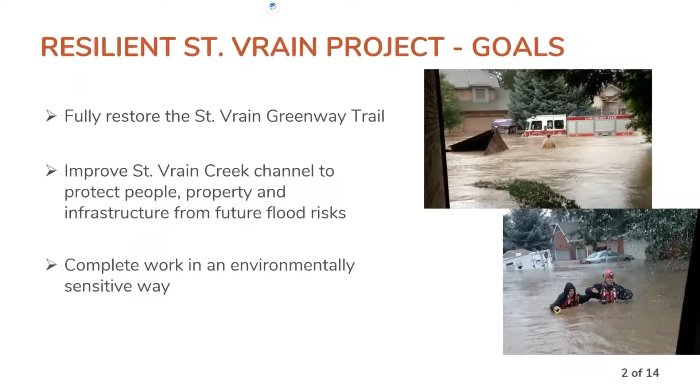The project was broken into several phases. The Sandstone Ranch Reach, out to the east side of town beginning at Boulder Creek and working upstream to County Line Road, was the work to restore the St. Vrain channel through the city's open space out of the Sandstone District Park.

There's a gap reach between Sandstone and the city reach. For connectivity and floodplain analysis, we certainly evaluated that section. However, there were no project improvements included in the master plan within what we referred to as the gap reach there.

And then finally, the City Reach, which is the section of St. Vrain Creek through the developed portion of town, really from the confluence with Left Hand Creek out west to Airport Road at the extent of the city's planning area.

This next slide zooms in on the City Reach itself, which is the majority of the work to be completed on the project. This slide illustrates the phases.

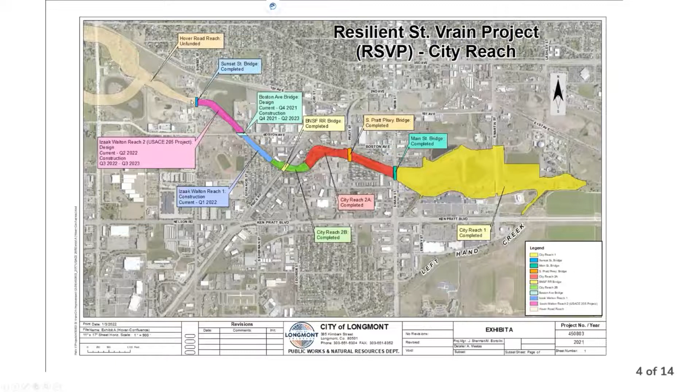I have a short video that I'm going to try to play, so I'm going to get out of my slideshow presentation. I was preparing this slideshow presentation and realized that this video is now about 1.5 years old, and maybe worth doing another aerial flight to show improvements on St. Vrain Creek. Oh, hang on. Here we go.

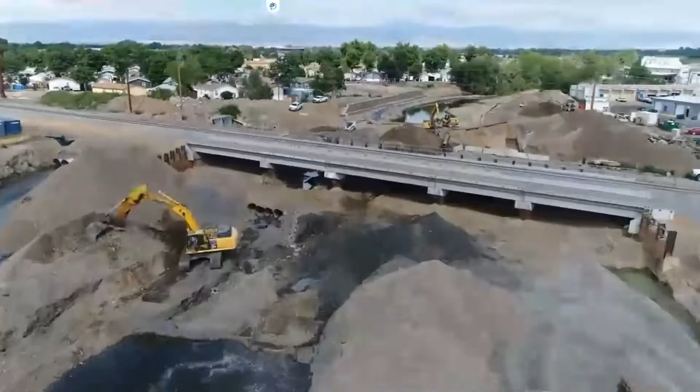Okay, let me find my mouse and I will. Oh, sorry. Oh, sorry.

So clearly I put together that presentation for a council meeting back in August of 2020. I like the very end of the video where you can see the work going on, but that work's complete now and a lot of vegetation is filled in, so we'll have to try to update that video. Okay, so back to the presentation. It should be back on the screen again.

As I'd mentioned, some of the work that's been completed, city reaches 1, 2A, and 2B, including replacement of several bridges over St. Vrain Creek. Some of the accolades for the project: it received a 2018 APWA award for sustainability for large communities, and also an APWA Colorado Chapter award for parks and trails. That project was for the Dickens Farm Nature area.

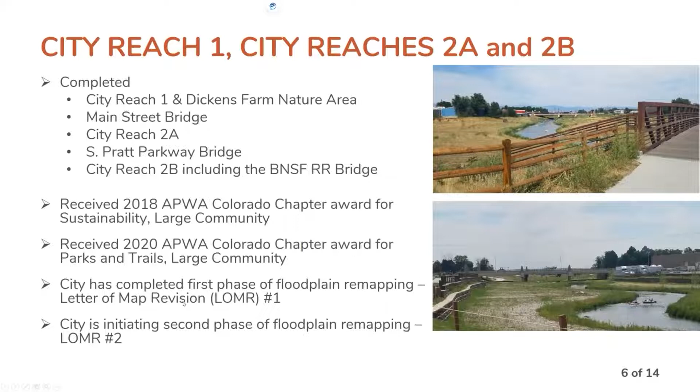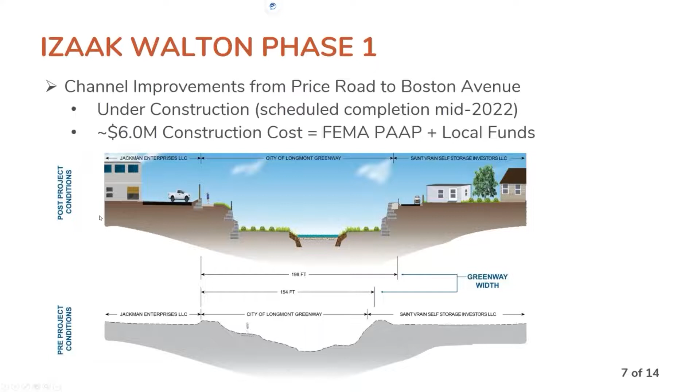Izaak Walton Reach 1 is the section that I said was under construction. Again, it's scheduled to be completed in the spring of this year as we get a chance to complete landscaping and revegetation. That was a section with retaining walls adjacent to the St. Vrain Mobile Home Park, and located behind the Left Hand Brewing tasting room, if that's a landmark for you.

Again, the next phase going upstream is the work we're doing with the Army Corps of Engineers through a public partnership agreement. That work is from Boston Avenue up to Sunset and includes the Boston Avenue Bridge replacement. The city is leading the design of the Boston Avenue Bridge replacement, and the Army Corps of Engineers is leading the design effort for the channel improvements starting upstream of the bridge to Sunset, which includes reconstruction of a levee between Izaak Walton Pond and St. Vrain Creek. This helps protect the split flows that we saw during 2013, where the Izaak Walton Pond breached on the east side and flooded down through First Avenue and the railroad tracks.

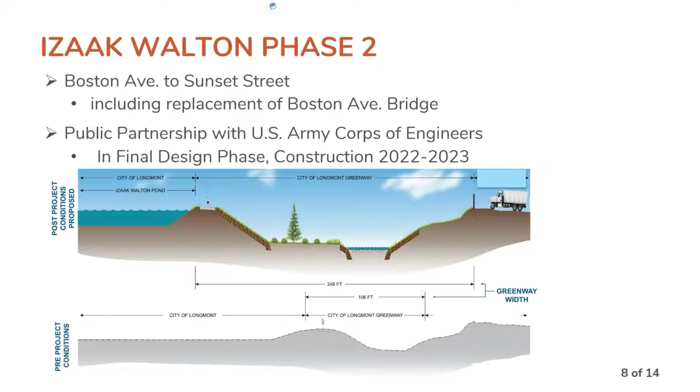A little more information on phase 2 and that partnership with the Army Corps: that's approximately a $15 million project, and we're cost sharing with the Army Corps through that public partnership agreement. The city's funding match comes from several sources, one being local funds required for design. The Army Corps gives credit to the city for land ownership and acquisition, so the value of the property where improvements are being made is considered part of the match. And then there's work in kind, which in this case is the Boston Avenue Bridge replacement, a significant portion of the city's match.

In fact, a minimum would be a 35% local agency match on the city side, and we are matching up to 49% in this particular agreement because of the cost of that Boston Avenue Bridge replacement. The schedule for this work is that the Boston Avenue Bridge replacement is in final design -- actually complete -- and we're looking at going out to bid in the next month or so. That project should be under construction in the second quarter of this year.

The Army Corps is working on 65% design for the channel improvements through their section, due to submit that design for review at the end of this month. That would put them toward 95% design by spring, and then they'd like to go out to bid on their section later this summer, starting construction late summer or early fall of this year for the channel improvements. So as we complete one phase of the project, it dovetails into starting the next phase of work.

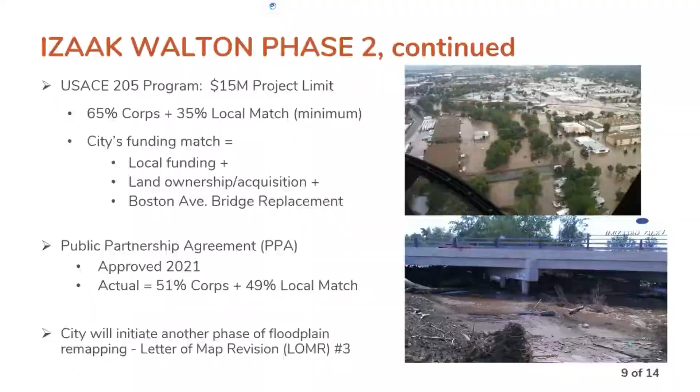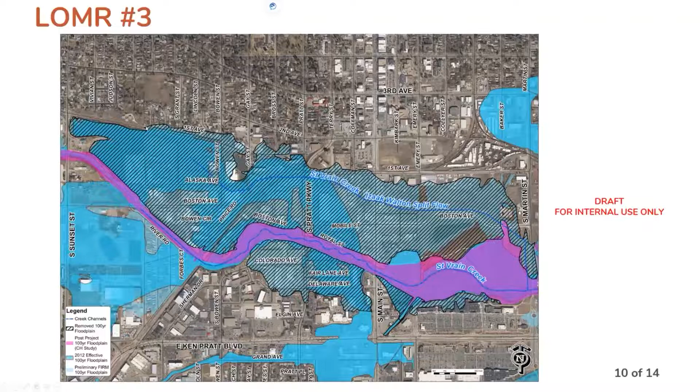Then what you see to the west here is additional floodplain that'll be captured and mitigated when improvements are completed west of Sunset. And I have some slides upcoming that illustrate that. So again, City Reach 3 is from Sunset Street going west to Airport Road.

We would anticipate that work being completed in phases, similar to how the downstream project has been completed. The first phase or reach that we are considering is the Hover Road reach, so it would be improvements from Sunset Street upstream to Hover Road or Hover Street, including a new crossing, a new bridge at Hover. The goal of this project is to capture out-of-bank flooding that's occurring upstream of Hover and coming out of the South Bank or the River Right and flooding over Hover Street and then into Fairgrounds Pond.

And the preferred design alternative is to create a split flow channel through Fairgrounds Pond to capture that overbank flooding and then return those flows back into the main stem of St. Vrain Creek.

This work is about a $20 million project to get from Sunset to Hover, including a new crossing at Hover Street. And the city's actively looking for grant funding to be able to complete that work.

And the benefits would be that this area that you see south of St. Vrain Creek down to the railroad crossing and Price Road is the 100-year floodplain. And the area that's in sort of this salmon color would be the area that's removed from that floodplain with these project improvements being completed.

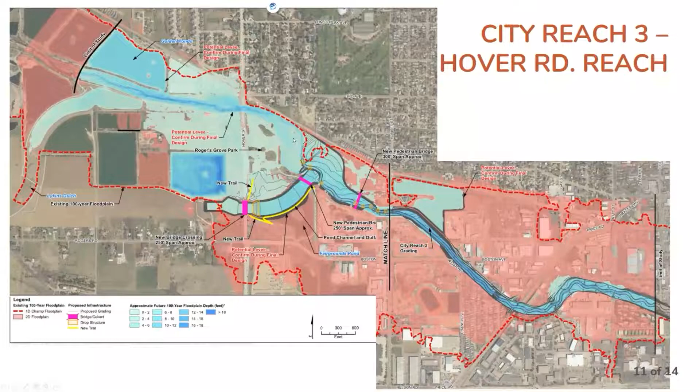So what does RSVP cost? The estimated total cost for the project is around $140 million.

So how do we pay for all these project improvements? Funding came from several sources. One of them was a $20 million voter approved storm drainage bond following the 2013 flood.

We also utilized FEMA disaster recovery, Public Assistance Alternative Procedure, so a PAP project, Housing and Urban Development, Community Development Block Grant, so CDBG, DR, Disaster Recovery. Both of those were a result of funding that was available following the 2013 flood.

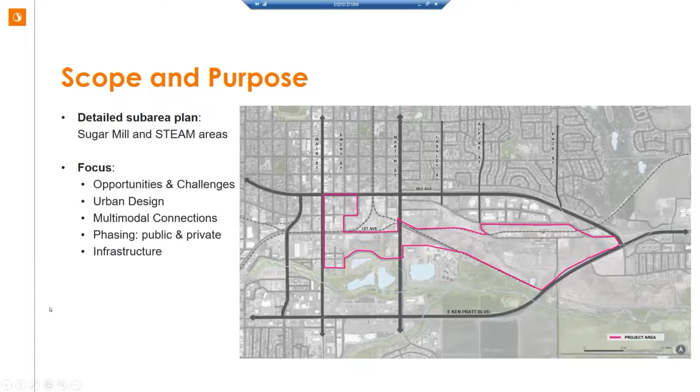This study is also helping us look at phasing. This is a pretty large area, and we've seen an increase in development interest. There's growth being proposed throughout Longmont, and this area is no exception. Some areas near downtown will be removed from the floodplain with the Resilient St. Vrain project, and portions of the steam area are included in that. So we need to think about what makes sense from a phasing perspective, and for public and private investments in infrastructure. This plan will help us create a framework to work with the community, the development community, and property owners.

We've developed some high-level goals for the project. If you go to our Engage Longmont site, we have these up, and we're interested in hearing from the community on what is most important. Housing is incredibly important to our community, so how can we think about diverse housing options at appropriate locations in this study area—a wide range of types, different types of ownership, and different price points.

Transportation is huge, as I've mentioned a few times. We're looking at both internal connectivity and how we connect to other areas of Longmont and to the larger region, and what makes the most sense for a variety of different modes.

In terms of development, there's a lot of interest in various portions of this area. We want to make sure this development is well connected to the existing portions of Longmont, both in the traditional sense and in terms of the type of development we're seeing.

From a community perspective, we want to build on the work some of you may have participated in with the STEAM visioning that Council led in 2019, to think about how we incentivize and encourage cultural arts facilities, innovation, and creativity. We're not talking about replacing downtown or the museum or the makerspace we have, but how can we build on that? Longmont has such an incredible community of artists, innovators, and makers, and we're interested in learning what this space can add to that.

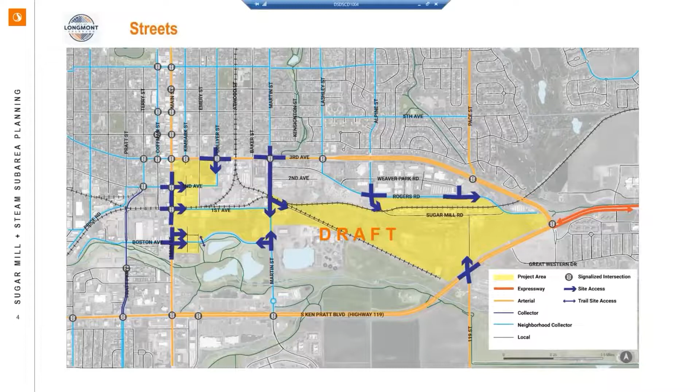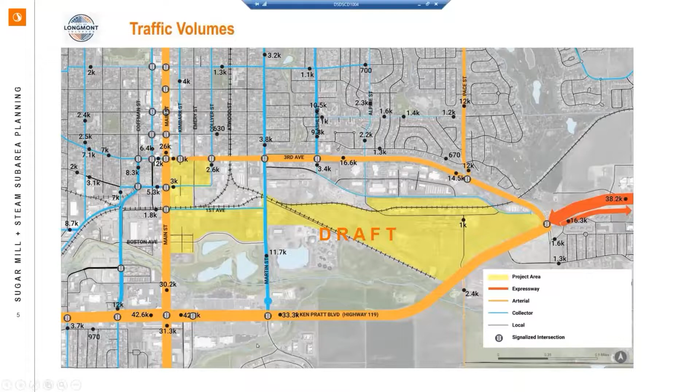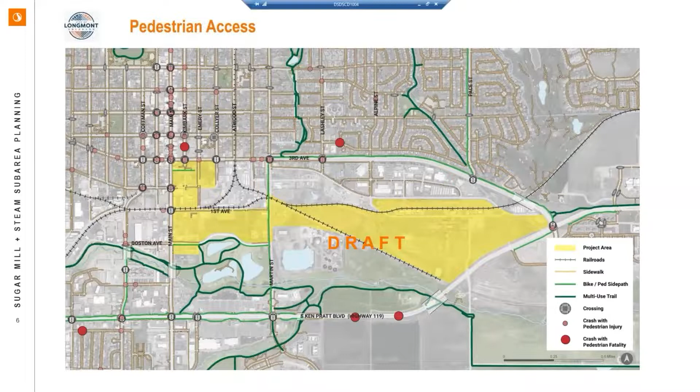We're also thinking about the work that Tyler and his group do in terms of planning for signalization, what makes sense in the future. We're taking all of this information in. As we think a bit more about pedestrian access, the western side of the study area probably has better facilities and access currently, while portions of the eastern study area are a little more isolated, so to speak. But that's something this plan can definitely address.

Bike infrastructure is essentially the same story. We've got a pretty robust network and more plans in the works on the western side. We really need to focus on how we connect to the neighborhoods north of the sugar mill, also to Mill Village to the southeast, and the Greenway Trail system we just talked about in your last item.

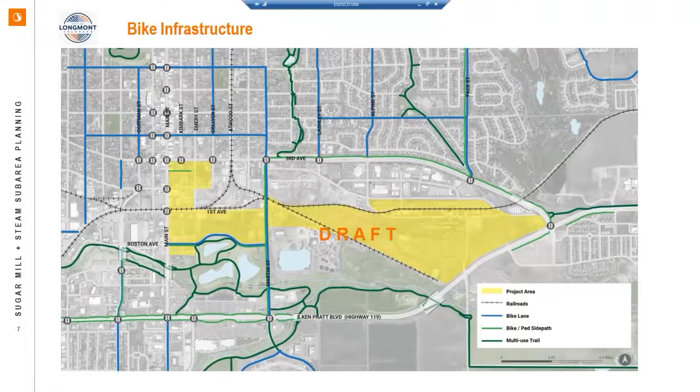So we'll be taking a look at all those opportunities as we move forward. The western portion of the study area is served by a variety of transit routes. The eastern area, not so much—a theme you're probably seeing here. But we do have a variety of local routes adjacent to the STEAM area, and some regional routes as well. There are also opportunities with the future BRT and the future Coffman Street corridor, which I'm sure you're all well aware of, so we're taking a look at what opportunities that presents for the STEAM area.

Obviously, this is adjacent to the future First and Main facility, which creates incredible opportunities, both from a transportation perspective and a placemaking perspective. So that's something we'll be looking at closely.

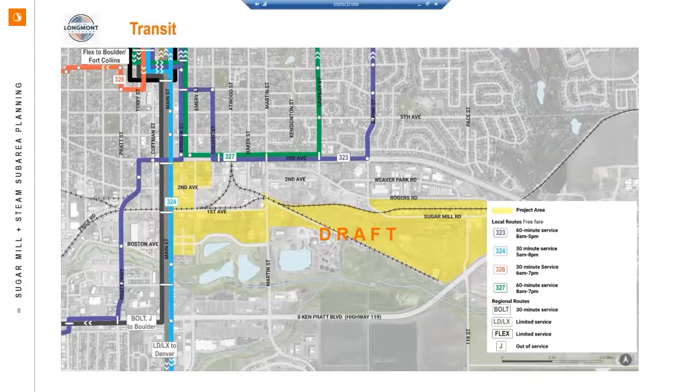Finally, railroads present an interesting challenge and opportunity. You can see there are several rail lines in and adjacent to the study area. So we'll be working with property owners and transportation folks within the city to think about what opportunities exist for potential realignments. There's already been some work done—Emery and First was a major project that Tyler, I'm sure, has shared with you, and that's recently completed. So we'll see more improvements in terms of rail crossings.

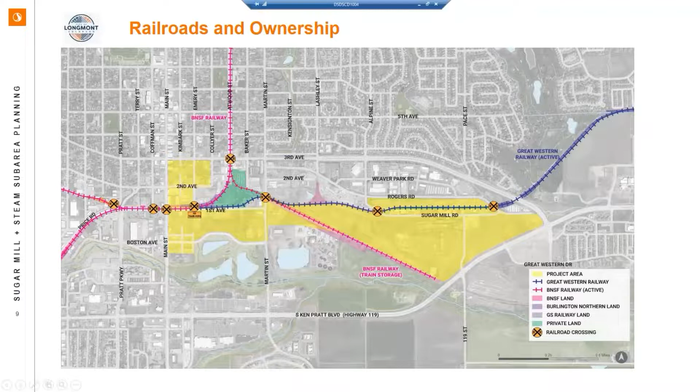As we think about potential connectivity options in and adjacent to the study area, we really need to think about railroads and what our options are. That's something the project team will be looking at in great detail.

Also worth mentioning, while not specifically related to transportation, there are a number of development projects and interest in development that aren't even formal projects yet. That's why it's so important we do this sub-area plan right now, because what we're finding is a lot of folks are coming to the city with development ideas and asking what the city's vision is. We certainly have some high-level guidance in our comprehensive and multimodal transportation plan, but we don't have detail on that.

So we want to provide detail on what the community thinks is the most appropriate adaptive reuse for the sugar mill, the historic sugar mill buildings, and what the community thinks will be most effective for the STEAM area and its adjacency to Dickens Farm Nature area and the transit station. I show this so you can see all the projects currently under review and those we've had pre-application meetings for, which is the very first stage in our development process.

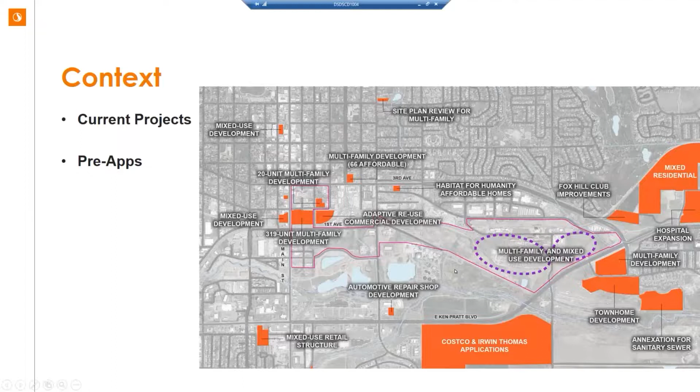So there are lots of opportunities within this sub-area, and I'm not going to go through all these in detail, but suffice it to say, we're not starting from scratch—there's been a lot of planning work done in this area.

City Council, as I mentioned, did some visioning in 2019, with 3 meetings with an advisory panel. We had an Urban Land Institute technical advisory panel come and give really robust recommendations on the sugar mill adaptive reuse. We recently completed a Main Street corridor plan, which I believe we presented to this group back in 2018 or 2019. First and Main has been undergoing extensive planning since really 2012.

This is also a gateway to Longmont from the east and a gateway to downtown from the south. And so there's some opportunities for placemaking there.

I've already mentioned housing. We think this is a real opportunity for looking at some of those missing middle housing types that might be sort of between really high dense housing and single family detached. We think there's a market for that here, and I'll show you that here in just a second with the market study we had done.

Obviously, some incredible opportunities to integrate with the existing open space system that's already been established along the river and connect to the trail system that's part of the St. Vrain Greenway.

From a transportation perspective, we'll be taking a look at best practices. There's some really great examples throughout our region and the nation of complete streets and how we might apply those to some of the streets within and adjacent to the study area. We'll also be looking at opportunities for green infrastructure and low impact development, building on the existing assets that are within and adjacent to the study area.

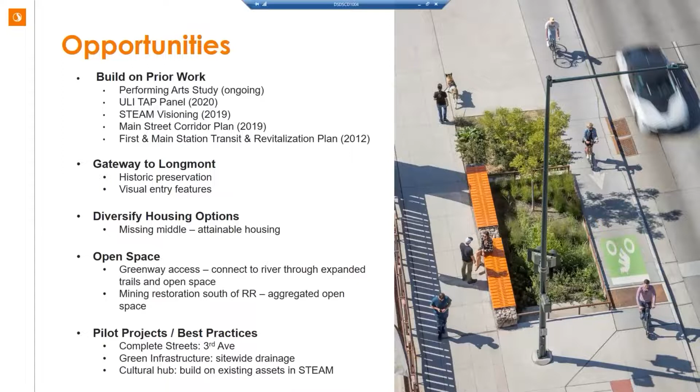Several challenges that we need to be aware of, and I've already alluded to some of these, so I won't belabor this, but I mentioned we need to evaluate existing signalization and then what the plan is for the future, and think about how we're going to handle traffic on these streets.

There's a lack of connectivity in and around the sugar mill, and so what does that look like? You may be familiar with the extension that we currently show on our comprehensive plan of Pace Street, but I think over the years we've realized that may not be the most practical way to provide connectivity to this site. So we'll be looking at other options for connecting the sugar mill area to the north in particular.

I've mentioned some of the challenges with the railroad crossings. There's some questions being considered on what does a realignment mean? Is that the same as a relocation? And what would that take to work with the railroads?

We have this great trail system that goes along the south end of the study area. We also have a railroad that could potentially inhibit our access. So how can we connect to the St. Vrain Greenway effectively?

And then obviously, probably not a surprise, there are some environmental conditions that are going to need to be mitigated in and around the sugar mill site itself. So as part of this project, we worked with our consultant to prepare a brownfields grant, and that would help us plan for the cleanup activities.